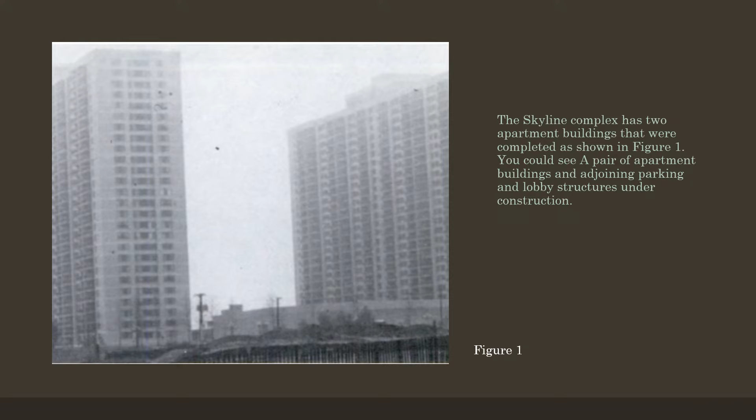I will be giving a description of the structure. The 3 structures under construction were designed under the Fairfax County Building Code ordinance, which incorporates by reference the provisions of ACI 318 through 363.

Building A4 of the Skyline complex contained reinforced concrete and was constructed with a flat plate, supported on a 4-foot thick foundation mat. Apartments were to be located 26 stories from the finished building, along with a penthouse and a 4-story basement. The typical story height from the first story up was 9 feet 0 inches from the top of the slab. The floor slab was 8 inches thick.

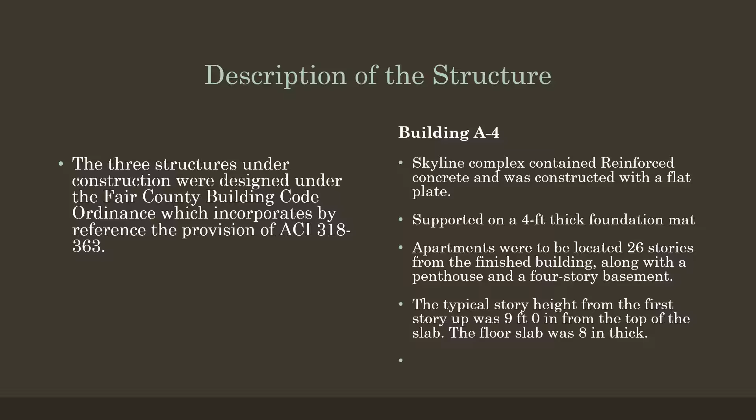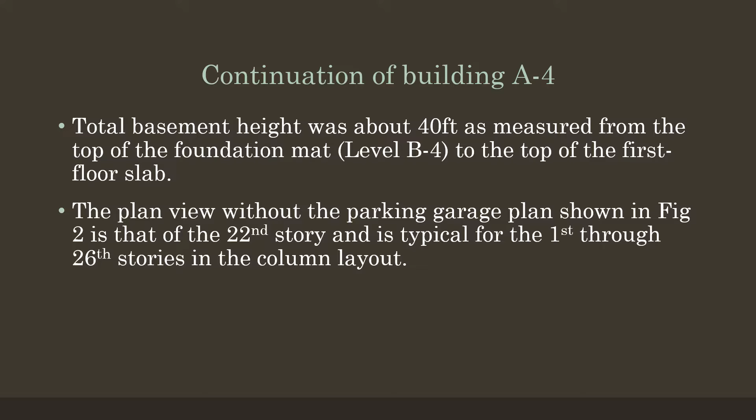Continuing on building A4: the total basement height was about 40 feet as measured from the top of the foundation mat from level B4 to the top of the first floor slab. The plan view without the parking garage, shown in Figure 2, is that of the 22nd story and is typical for the first floor through the 26th floor, and shows the column layout.

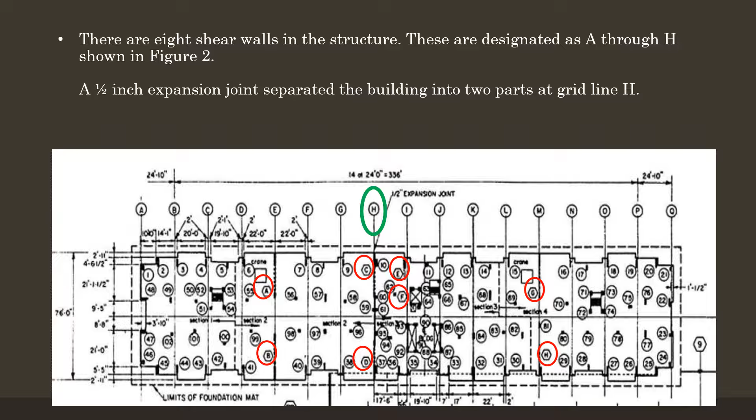In Figure 2, you are going to see there are 8 shear walls, which I've circled in red. There is also a half-inch expansion joint that I've circled here in green, labeled H.

This is the Skyline Plaza aerial view. Here you're going to see marked in red where the collapse happened. This photo was taken at 11 a.m. on March 2nd, 1973, just before the collapse.

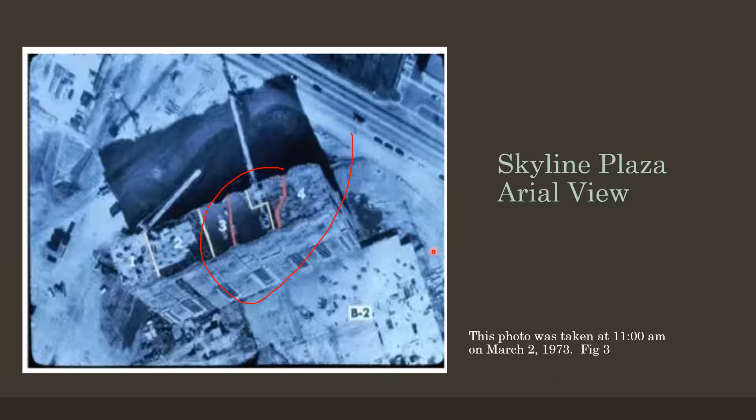We will be going over the Skyline design strength of the concrete. Let's begin with floors 1 through 7. Here you can see that the slab on these floors are 3,000 psi, or 20.7 MPa. The columns are 5,000 psi, or 34.5 MPa.

From the 7th floor to the 17th floor, the slab stays the same, but the columns change to 4,000 psi, or 27.6 MPa. From the 17th floor to the top floor, the slab remains the same, but the columns change again to 3,000 psi, or 20.7 MPa.

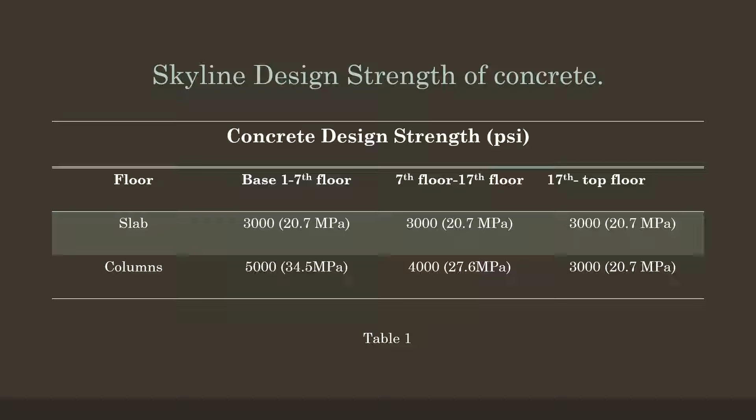Going over an overview of the collapse: it occurred around 2:30 p.m. on March 2nd, 1973, while under construction, as the 24th floor slab was being cast.

Shortly after lunch, some workers observed slab deflections of approximately 150 to 600 millimeters, which is 6 inches to 2 feet, for both the 23rd floor slab and the freshly placed 24th floor slab. The freshly placed section of the 24th floor slab then fell into the 23rd floor slab, starting a collapse that continued all the way to the foundation.

The building's collapse removed the edge support from the parking garage, and falling debris triggered the failure of the garage.

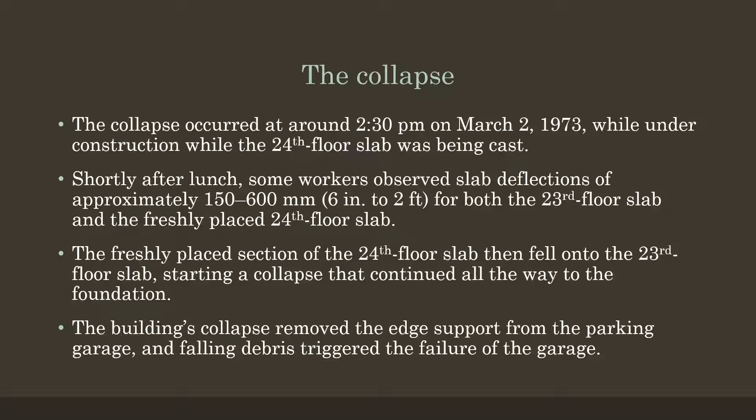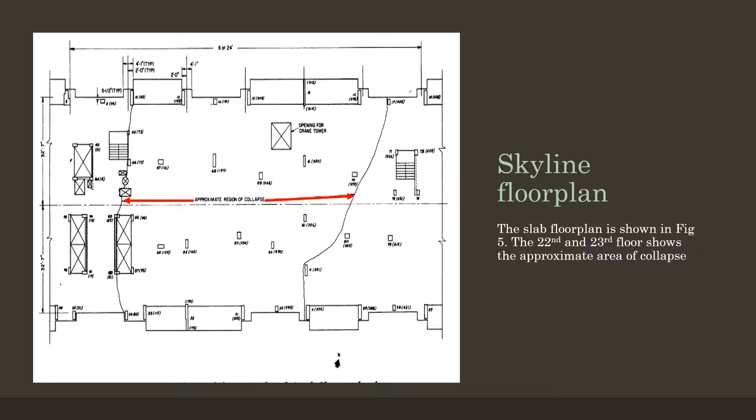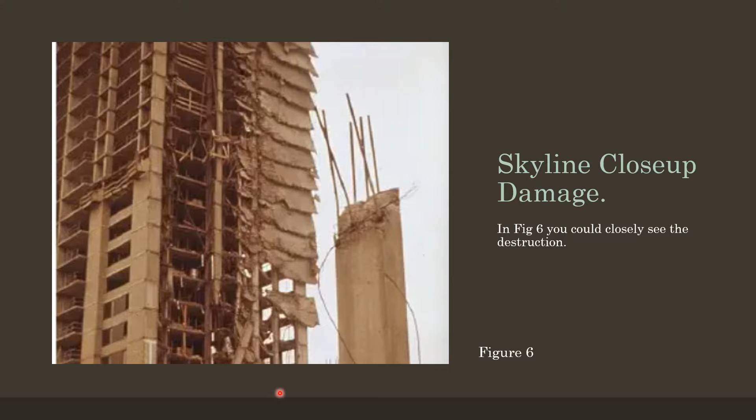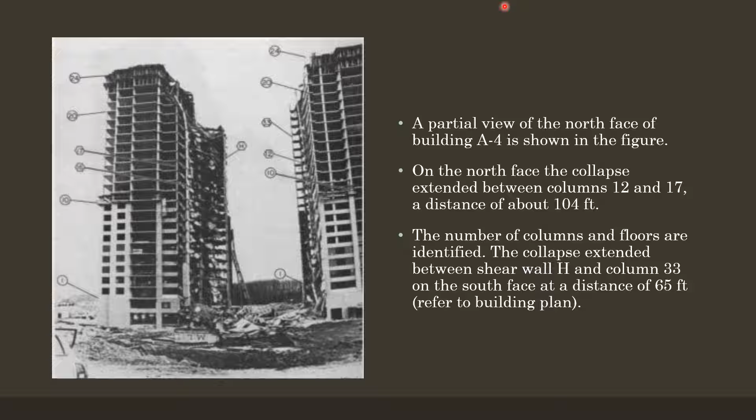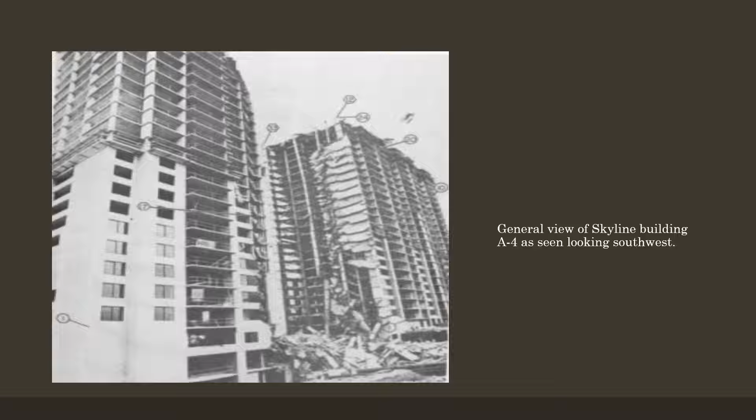Continuing from the collapse: once the section of the apartment building collapsed, the failure propagated horizontally through the attached parking garage. This resulted in the death of 14 construction workers and the injury of 34 others. Of the workers killed, 10 were in the tower and 4 were in the garage.

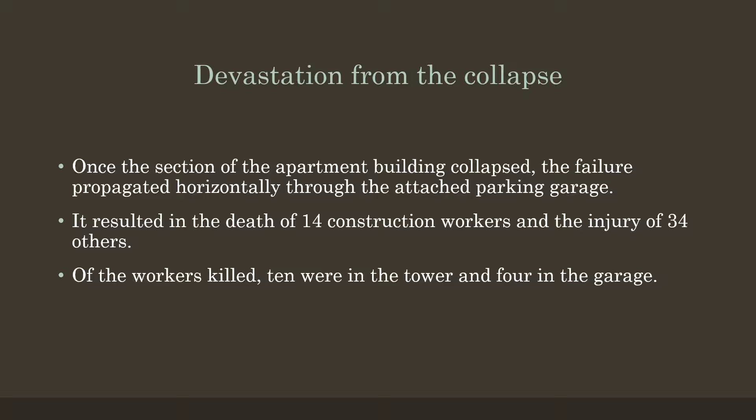Investigation of the Skyline collapse: the U.S. Department of Labor's Occupational Safety and Health Administration, also known as OSHA, case files, and information from on-site inspections by National Bureau of Standards inspectors have been used to study the collapse of the Skyline Plaza apartment building A4.

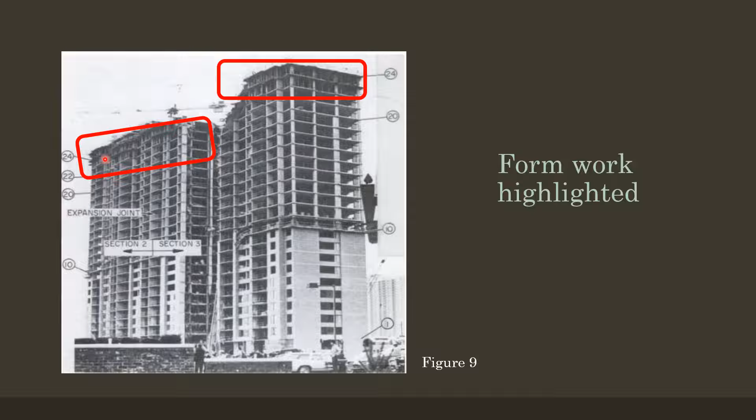This previous figure shows the locations of the formwork from March 2nd, shortly after the collapse. Full formwork was placed on the 24th and 23rd stories in sections 1 and 2. Some formwork may have been seen in the 22nd story in sections 2 and 3. Full formwork was also in place under section 4 on the 22nd and 23rd stories, but there was no reshoring that can be seen under section 4 below the 22nd floor on figure 9.

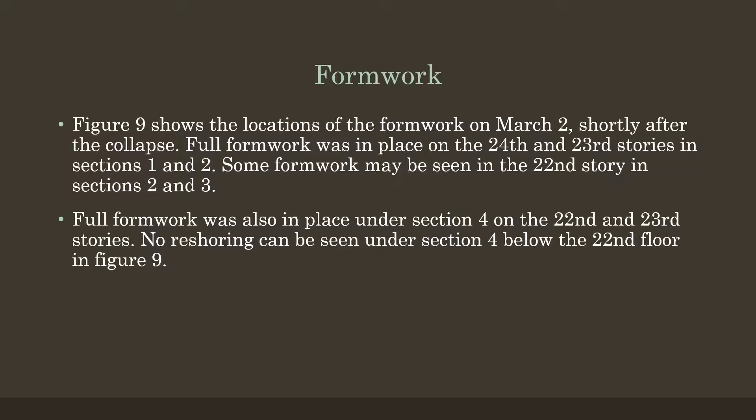Here I will be going over the formwork, shoring, and reshoring for the Skyline complex. According to OSHA regulations, ANSI A10.9 sections 6.3.2 and 8.1.5, it is required that a lateral bracing system is capable of resisting a lateral force of at least 2% of the dead load of the slab.

There were stringers erected with a shore under each end, wherein the stringer was inserted in a basket-like socket connected to the shore. Stringers and joists were usually 16 feet long, although some were as short as 6 to 8 feet. The formwork sheets submitted to Fairfax County contain no mention of lateral bracing for the form system.

However, a limited amount of bracing may be seen in figure 10 in the next slide. You will see diagonal lateral bracing was installed after every fourth shore at about 16-foot intervals.

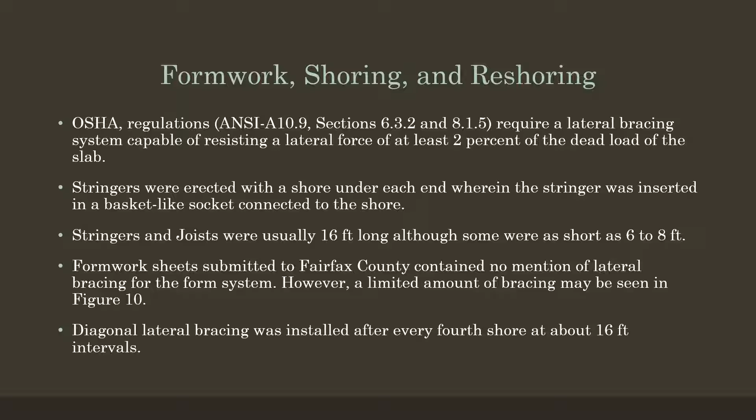In figure 10, you are going to see formwork in sections 1 and 2, which would be here. For reference, several sections have been identified. You will see here 1, 2, 3, 4, 5, and in section 3 you don't see any shoring at all.

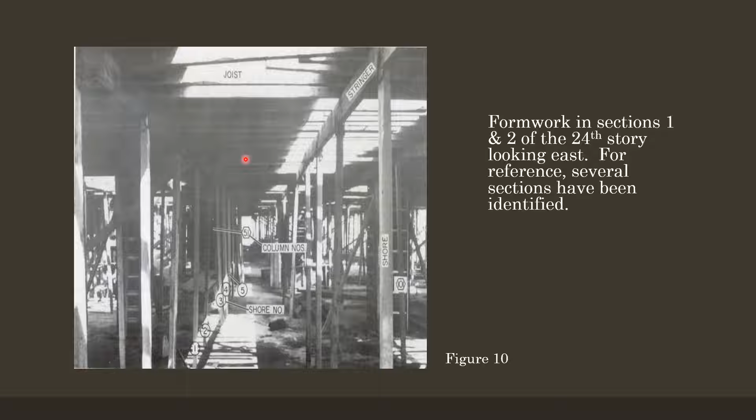Here you can get a better picture of the stringers and the joists. Here you're seeing the reshoring in section 2 of the 22nd story as of March 6th.

There is conflict in their statements. A number of workmen that escaped the building by way of the stairs in Section 4 have indicated that the 22nd story was either partially or entirely stripped in Section 3. Photographs taken right after the collapse showed that while full shoring remained on the 23rd and 24th stories, it had nearly all been removed from the 22nd story in Sections 1 and 2 but remained in Section 4.

According to OSHA regulations, forms are required to be in place for a minimum of 10 days with temperatures greater than 50 degrees Fahrenheit for spans longer than 20 feet, per ANSI A10.9 section 6.4.8. The engineer's structural drawing required 2 full stories of shoring and 1 story of reshoring while a concrete slab was being cast.

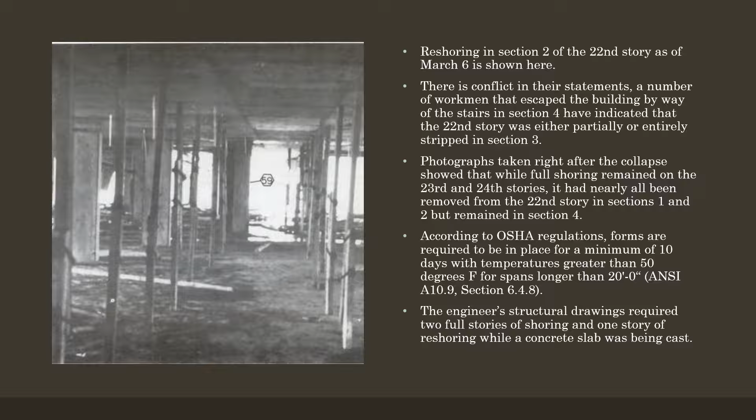Here, during the NBS site inspection, a considerable portion of the lumber used for the remaining forms in the 24th story was found to be in poor condition. You can see right here, it was out of plumb.

So the photograph illustrates a shore that is out of plumb and has a vertical crack near the top. According to OSHA regulations, this requires correction of this condition prior to placing concrete, which is not yet placed on these forms.

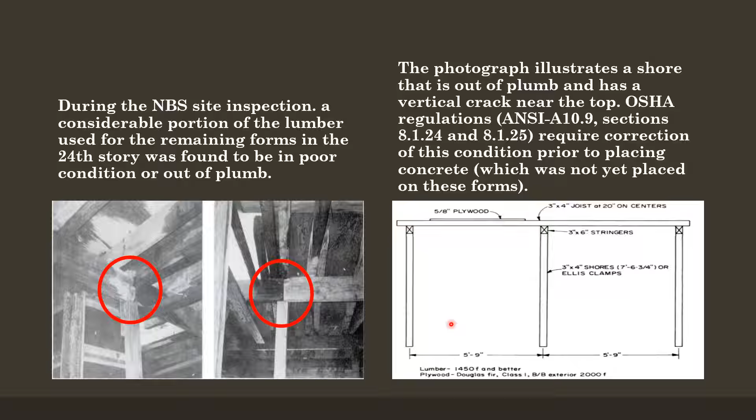In this picture, you can see the correct way. In the case of the 24th story, OSHA regulations required correction of these conditions prior to placing concrete.

Here you're going to see the same thing is happening on the 23rd floor, where the wood is apparently damaged and reused. If you can see here, this is not even correct. A piece of the 2x4 is missing.

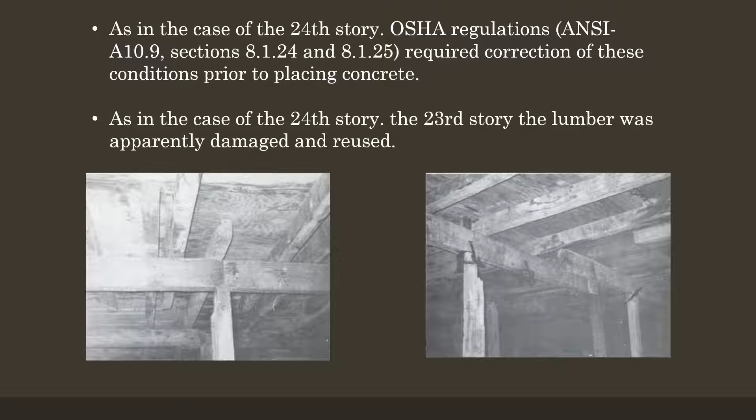We are looking north of the building. This is an estimation of the location of forms and reshores at the time of the collapse. Here you're going to see there's missing reshoring and there's missing reshoring here. So this is where the problem possibly could be.

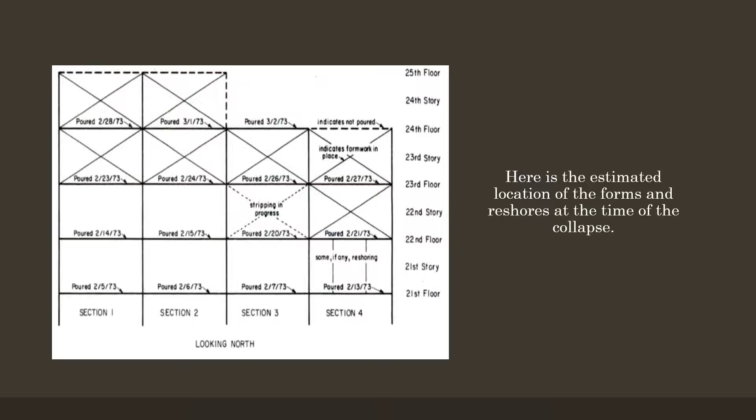The laborers on site, one concrete finisher working near the stairwell around columns 65 and 66, indicated that a large deflection was seen in the middle of section 3. However, the middle of section 3 is about midway between columns 67 and 85.

The statement of one worker gave the investigators a good idea of the state of the forms at the time of the collapse. One workman indicated that at the time of the incident, he was placing reshores in section 3 of the 21st story, that some reshores were present when he started working. Prior to the incident, all the reshores fell out except those on the balcony areas.

This is consistent with what could occur if the forms had been removed in the story above. If the shoring had been removed on the 22nd floor, the 22nd floor slab would have been relieved of its previous loads. With less loading, the deflection would have decreased in the slab, causing the reshores on the 21st floor to fall out.

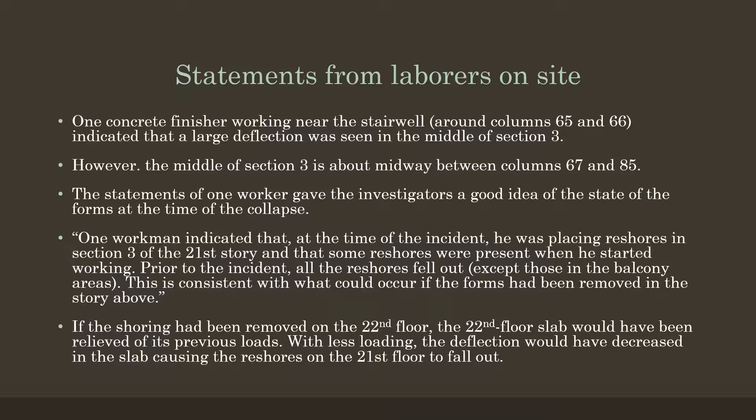According to OSHA regulations, required field-cured cylinders stored at the same temperatures as the structure verify the strength of the structure before removing shores and formwork. The results of standard ASTM C39 concrete cylinder tests showed adequate strength at 7 and 28 days.

However, these were laboratory tests with cylinders stored at a controlled temperature. Particularly in cold weather, laboratory tests do not correspond to the strength of the concrete in place in the structure.

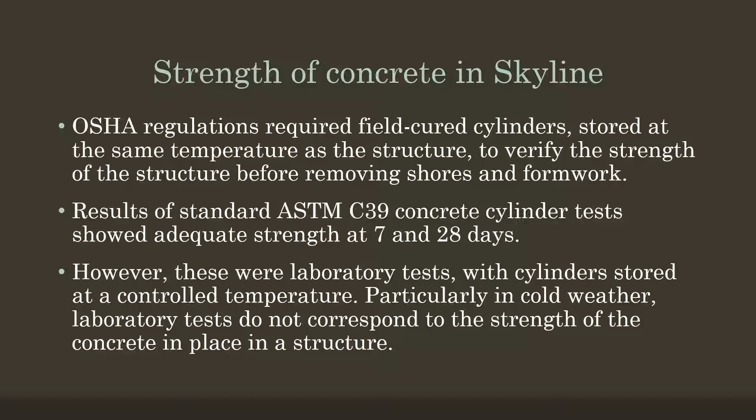Failure. The premature removal of forms supporting the 23rd story slab, when the concrete of the slab had a relatively low strength, produced shear stresses that were in excess of the concrete capacity at the time of the incident.

The most likely mode of collapse has been determined to be a shear failure around columns 67, 68, 83, or 84. The accumulation and impact of debris from the 23rd and 24th floor slab would have overloaded the 22nd floor slab and induced progressive collapse of successive floors to the ground.

The collapse is believed to have started with shear around columns 67, 68, 83, or 84. The loss of support from any one of these columns would lead to overstressing of the remaining columns.

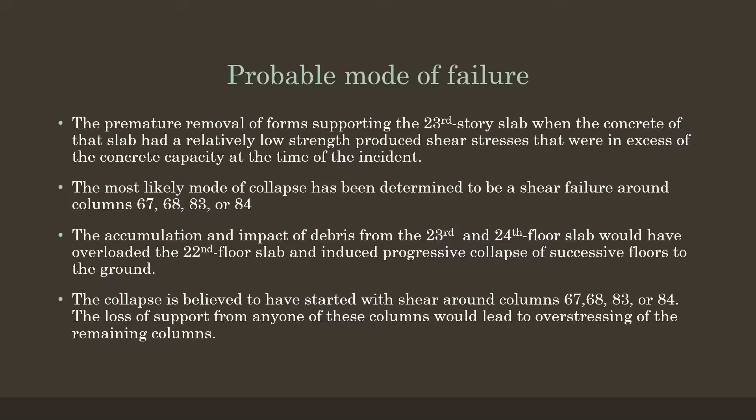Investigation of failure. The three-dimensional elastic analysis was performed using the finite element analysis program known by the acronym SAP. The evaluation of the capacity of structural elements was based on the provisions of ACI 318-71 code and on procedures from published analytical and experimental research.

Each of the three finite element analyses had a particular purpose. Case 1: some employee statements indicated that the 22nd story forms were entirely removed at the time of the collapse. Case 2: the concrete is assumed to have attained its full 28-day design strength of 3000 psi.

Case 3: some employee statements indicated that the removal of shoring under the 23rd floor slab in the central corridor area of the building was in progress on the day of the collapse.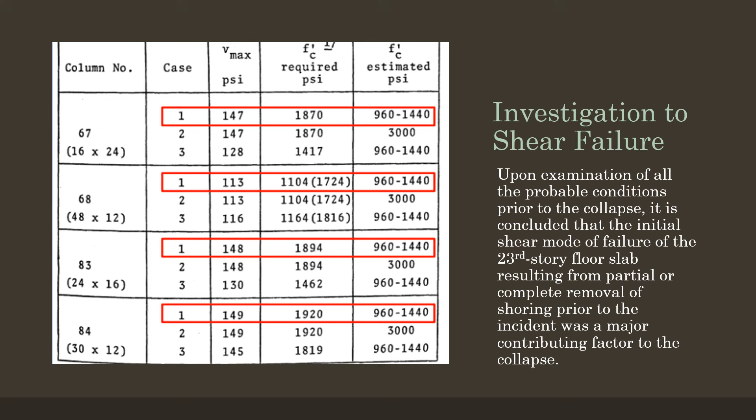An analysis of the 23rd floor slab indicates that its most likely mode of failure was in shear around one or more columns in section 3 of the floor slab.

The strength of the 23rd floor slab on the day of collapse has been found to be of a magnitude that complete or partial removal of shoring underneath the slab would have produced a shear failure in the slab. The weight of debris resulted in failure in the slab below and carried through the heights of the building.

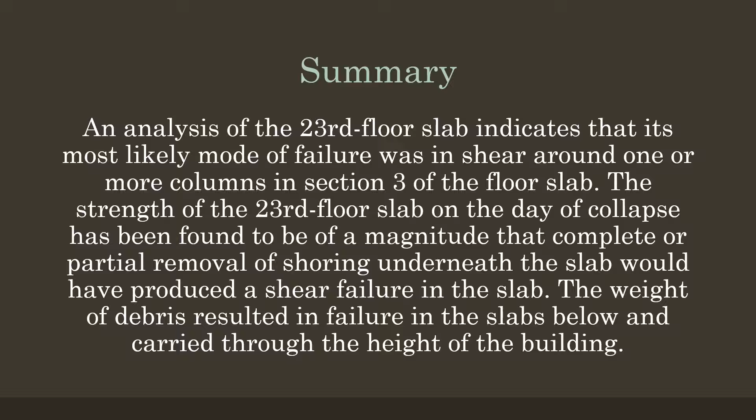There was non-compliance with OSHA regulation. First, there was the premature removal of the 22nd story forms. The forms removed on the 22nd story were in an area with spans exceeding 20 feet and therefore should have been in place for 10 days at temperatures exceeding 50 degrees Fahrenheit.

Shoring in section 3 of the 22nd story: the architect's specifications required that in all cases 2 floors shall be fully shored. The removal of the 23rd story forms left only 1 story of form in place under the recently poured 24th floor. Lateral bracing minimum values of 100 pounds per foot of floor edge, or 2% of the total dead load of the floor, whichever is greater, is required.

No evidence has been found which indicates that the lateral load was considered in the design of forms. The lateral bracing provided would not provide this resistance.

1. The shoring was out of plumb. 2. The shoring was damaged. And 3. There was no inspection.

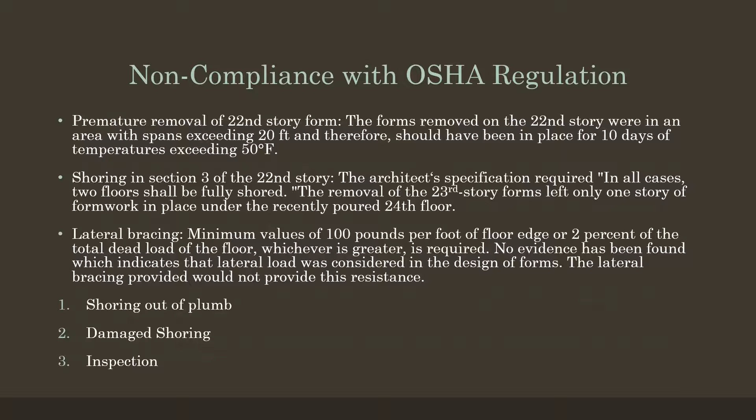Solutions to fix the collapse. Let's begin with the engineer of record. They should make sure he or she provides the contractor with all necessary design loads, data, and other unique project information.

Uncontrolled acceleration of formwork removal may cause a total or partial collapse, and continuous top and bottom slab reinforcement is necessary around the columns. Continuous reinforcement provides overall ductility.

Inspectors and other quality control agencies should verify that the contractor performs the previous 2 items. The contractor should prepare a detailed concrete testing plan for stripping forms, including cylinder tests. The contractor should be responsible for preparing formwork drawings, including shores and reshores.